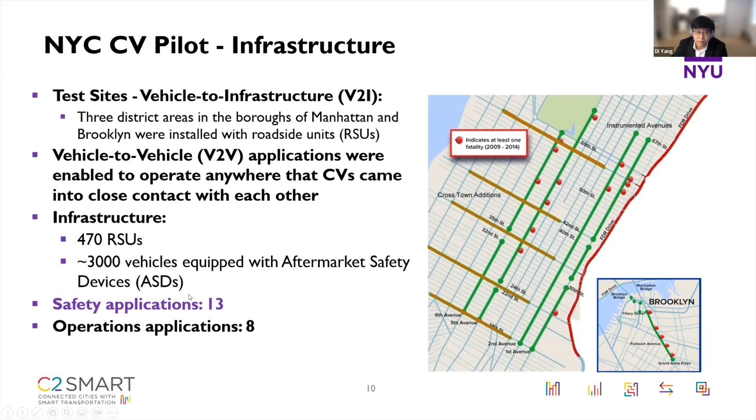And in terms of safety applications, for V2I applications, we have the following: red light violation warning, speed compliance, curve speed compliance, speed compliance at work zone, oversized vehicle compliance, where specifically we focus on over-height trucks, and also emergency communications and evacuation information.

And the V2V applications, again, can be enabled anywhere around the city. The V2V applications include forward collision warning, emergency electronic brake light, blind spot warning, lane change warning, intersection movement assist, and vehicle turning right in front of bus warning.

So besides the V2I and V2V applications, there is a third type which focuses on pedestrian applications. That includes the pedestrian in signalized intersection warning to vehicles, and also the mobile ped signal system, which was designed specifically to assist visually disabled pedestrians with navigation. So again, like I mentioned, there will be a dedicated webinar specifically to talk about all the pedestrian applications. So please stay tuned.

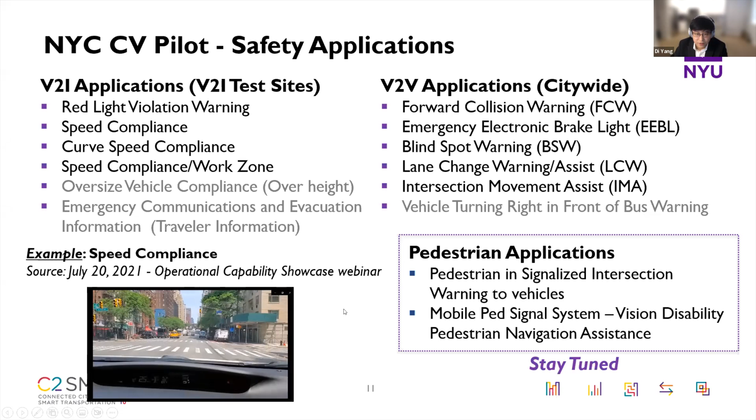Okay, and in terms of the experimental design, in this project a before-after treatment-control group design has been implemented. This is a quick illustration of this experimental design. Basically, all the CV fleet has been divided into either a control group or a treatment group. And the entire study period from January 1st, 2021 to December 31st, 2021 is divided into 2 periods, the before period and the after period.

So basically the before period is from January 1st to May 19th, and the after period is from June 1st to December 31st. And there's a small period in between, the transition period. During that time, connected vehicles in the treatment group will be transitioning to receiving active CV alerts. So in the before period, all those connected vehicles will not receive any warnings. But in the after period, connected vehicles in the treatment group will receive active warnings.

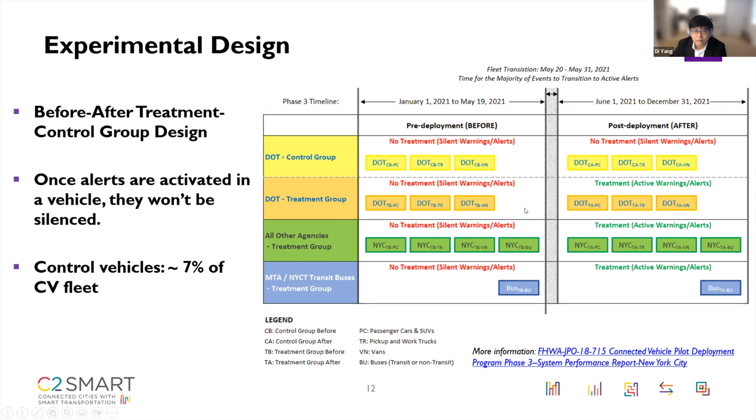And in terms of the data collection and obfuscation, in this project, the basic safety messages, or BSMs, transmitted immediately before and after warnings were collected. For each safety application, the number of seconds recorded before and after the warnings varies. But generally speaking, we have at least 5 to 10 seconds before the warning and 5 to 10 seconds or more after the warning, so that we know what is going on immediately before and after the warnings

are issued. And the data collected from these New York City connected vehicle projects are open to the public on the US DOT's ITS Data Hub CV Pilot Data Sandbox. So feel free to check it out if you're interested.

And besides collecting the data, the NYC CVPD project implemented a data obfuscation procedure, with the aim of protecting privacy and addressing liability issues for the participants. More specifically, the detailed latitude and longitude coordinates of the BSM data are replaced with artificial Cartesian coordinates, and also location bins. The unique IDs of the vehicles are removed, and the date and time are replaced with time bins, so we do not know the exact date and time of a specific event.

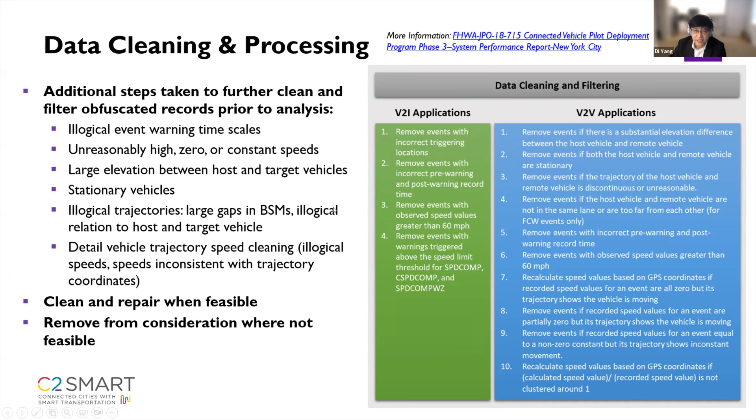Right. Okay, so now let's look at the safety evaluation methodology. So basically in this project, we employed 3 branches of methodologies to ensure that we can get the safety performance of the connected vehicles evaluated from different aspects. So the first one is to use the ASD data or the BSM data collected from the field. So what we did is that we first extract safety-related driver response behavior measures from the field-observed ASD data, and then we apply the gain score method, which is a relatively commonly used method in statistics to conduct before-after analysis.

And the second branch is the crash-based analysis. So here we employed the before-after safety analysis, which is a very common method in transportation safety to get the treatment effect of safety-related countermeasures. So in this project, the connected vehicle project is a potential safety-related countermeasure. So we employed the basic structure and framework of the before-after safety analysis in transportation safety for crash-based analysis. And we employed a survival analysis approach to conduct this analysis. I will talk more about that later on.

And the third branch is simulation-based surrogate safety measure analysis. So basically, for the first 2 branches, we use data collected from the field. And in the third branch, we use microscopic simulation to conduct a safety evaluation. And specifically, we calibrate the simulation model for both safety and operational measures and incorporate driver behavior models. And basically, we employ the multi-objective stochastic optimization method to do that. And I will also talk more about each of these branches later.

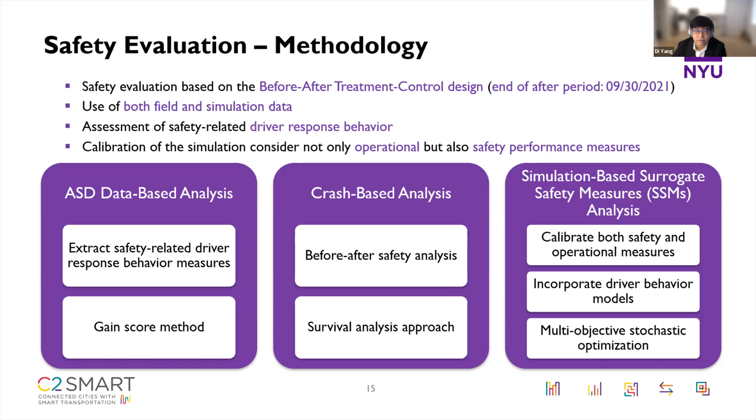Here, let's look at the first branch, which uses the ASD data. So here we extracted 3 safety-related driver response behavior measures by going through past studies in the literature. So the first one is the deceleration difference. It is defined as the difference between the maximum deceleration after a warning is given and the deceleration at the time when the warning is given. So basically, the main goal of this measure is to assess the driver's tendency to slow down, or basically the driver's response degree.

And the second measure is time duration to slow down to speed limit after warnings, which is defined as the time duration between the time when a warning is issued to the first time the observed speed is below the corresponding speed limit. Right, so we want to see how long it takes for drivers to react and slow down to the speed limit. And this measure is mainly designed for all the CV applications that correspond to reducing speeding events.

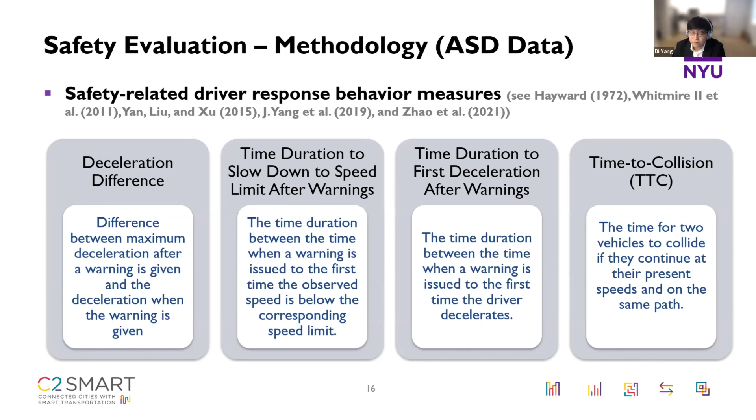And the third measure is time duration to first deceleration after warning. So basically, this is a more generalized measure compared to the second one, and is applied to all the CV applications that do not necessarily have a speed limit. And it is defined as the time duration between the time when a warning is issued to the first time the driver decelerates. And the last one is a very commonly used surrogate safety measure, time to collision, which is defined as the time for 2 vehicles to collide if they continue at their present speed and on the same path.

And in terms of statistical analysis, we include a commonly used gain score method to analyze the before-after control treatment group design. So basically what we did is that we first calculate 2 differences. One represents the difference between the performance measures in the treatment group from the before period to the after period. And the second difference is the difference in performance measures in the control group from the before period to the after period. And then we take the difference of these 2 differences so that we can get the safety effect, or basically the change in driver behavior based on the before-after control group design.

And due to obfuscation, we aggregate the safety measures to obtain the safety performance measures, and the confidence intervals are constructed by assuming the sample distribution follows the Student's t distribution. And that is the first branch of the methodology. And the second branch deals with crash data. So basically, we employed a survival analysis approach, which is a joint work by Dr. Kun Xie at Old Dominion University, Dr. Kaan Ozbay, who is my advisor at NYU, and also Dr. Hong Yang at Old Dominion University, and also me, right?

So basically, the main motivation for the survival analysis approach is that to assess safety countermeasures in the real world, it may not always be possible to find a proper reference group, right? So when that reference group is not feasible, the traditional before-after safety analysis methods, including the empirical Bayes or the full Bayesian method, may lose their power, right? So that is one of the main motivations to propose this survival analysis approach. Basically, instead of modeling the crash frequency or crash count, which is one of the most commonly used safety performance measures for crash analysis, we look at the time intervals between two consecutive crashes.

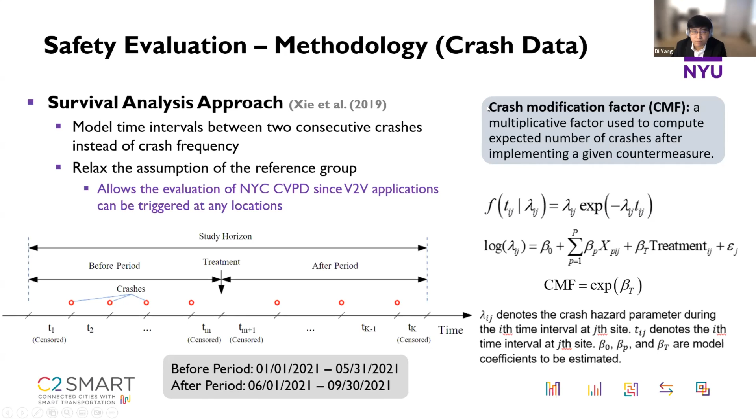And the third branch is the simulation-based method. So in the future, we have another webinar dedicated to this topic. So today, I'm going to briefly give you a little bit of a preview of this third branch, but stay tuned for that webinar.

So one of the main objectives in using simulation models to evaluate the safety effect of connected vehicles is that we need to be able to properly analyze the safety benefits of connected vehicles, right? So in order to do that, it is not only necessary to calibrate the simulation model for traditional operational measures, including volume, travel time, and turning movement, etc. But it is also very important to calibrate the microscopic traffic simulation models for safety measures. So here we employed traffic conflict severity distributions to do that.

And then we used the open source microsimulator SUMO for our analysis. And then we integrated 7 of the connected vehicle applications and the driver behavior model into the simulation model. And then we applied a multi-objective stochastic optimization, SPSA, for the calibration. And again, if you want to know more about the simulation-based safety evaluation and the calibration procedure, please stay tuned for that specific webinar.

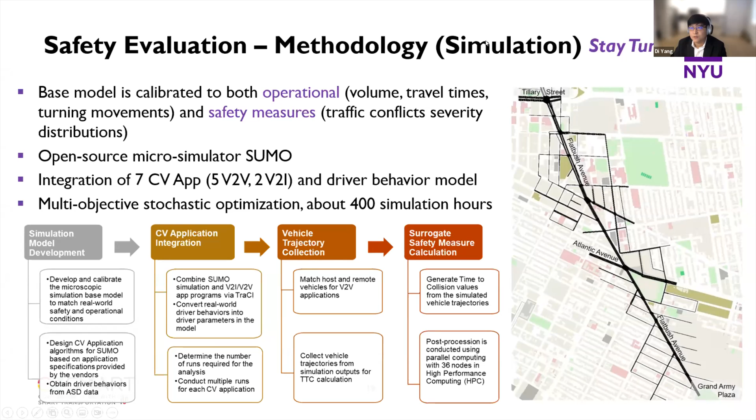Okay, so now let's look at some results. First of all, let's look at the results for the speed compliance application. After data processing and cleaning, the total number of events for speed compliance is a little bit more than 40,000 events. And compared to the silent warning scenarios, there are an additional 47 events per 1,000 events that show drivers slowing down to the speed limit when treatment was enabled. So basically more drivers try to comply with the speed compliance warnings after it has been turned on.

And in terms of driver response behavior, we saw an extra deceleration of 0.148 meters per second squared on average after the speed compliance warnings were issued. And there is also a small reduction in time duration to slow down to the speed limit. All three of these findings are statistically significant at the 0.05 significance level, which indicates that there are some safety improvements after the speed compliance warnings have been turned on.

Again, these results are based on the data collected from the field, right? So they do not include results from the simulation. And for the simulation results, please feel free to check out the webinar dedicated to simulation.

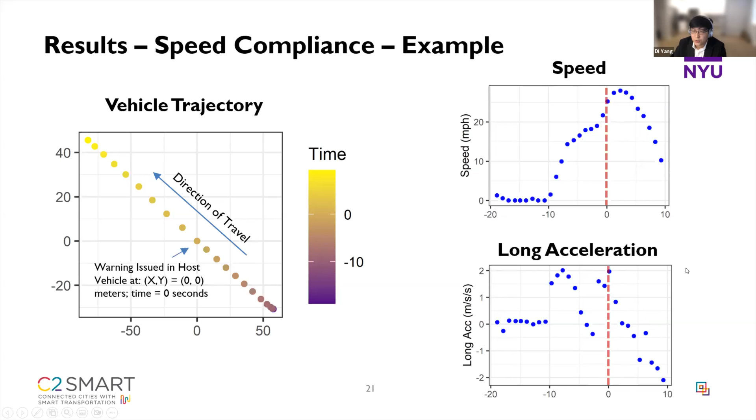As you can see, after the warnings are issued, there's a brief increase in the speed of the vehicles, but then followed by a deceleration, which can also be seen from the longitudinal acceleration of these vehicles, right? So at the time warnings are given, the drivers are accelerating, but then it slowly turns to deceleration, basically. And that is the first application.

Secondly, we have the curve speed compliance. The curve speed compliance application is only installed at one curve that connects the local streets to the FDR freeway. If you want to know more about that, please feel free to check out the report. After the data cleaning and processing, there are a total of 27 events.

We also analyzed the potential reduction in vehicle speed at the entry of the curve, as well as the lateral acceleration in the curve. We can see there is a positive reduction in vehicle speed and also a positive reduction in lateral acceleration in the curve. And they are all statistically significant according to the 0.05 significance level.

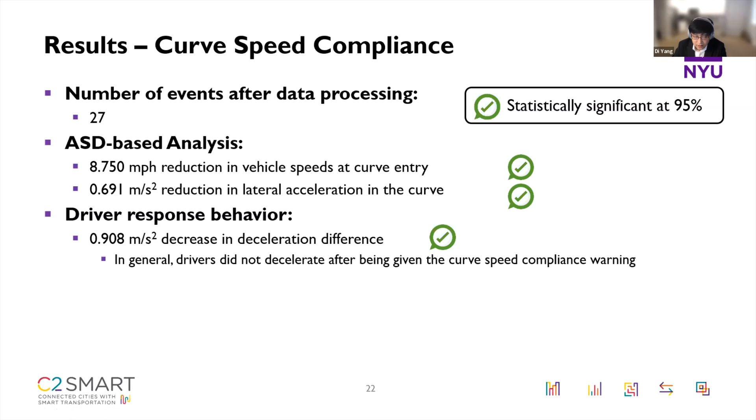And in terms of the driver response behavior, we can see there's a decrease in the deceleration difference. And this decrease is statistically significant at the 0.05 value. Basically, we were expecting to see an increase in deceleration difference. This is actually proved by just manually looking at these 27 events. Among these 27 events, drivers do not show the deceleration behavior after warnings are issued.

And for the speed compliance in work zone, after the data cleaning process, we have 2,665 events. For the driver response behavior analysis, we analyzed the deceleration difference as well as the time duration to slow down to speed limit. For both of these, we can see that there are extra decelerations in the drivers after receiving the warnings, and also a positive reduction in time duration to slow down to speed limit, and they are all statistically significant. Which means that for the speed compliance in work zone application, there are safety benefits or safety improvements after these warnings have been turned on.

And then let's look at another V2I application, that is the red light violation warning. After the data collection, we have a little bit more than 2,000 events. When we look at the number of events that drivers are likely to comply to the red light violation warning, compared to the silent warning scenarios, there are approximately 152 fewer likely red light violations per 1,000 events when treatment was enabled.

Right. So basically, to identify a potential red light violation, we look at the driver's speed. If the driver did not come to a full stop after receiving a red light violation warning, then we identify it as a very likely red light violation. So this is how to identify the potential red light violation using the ASD data.

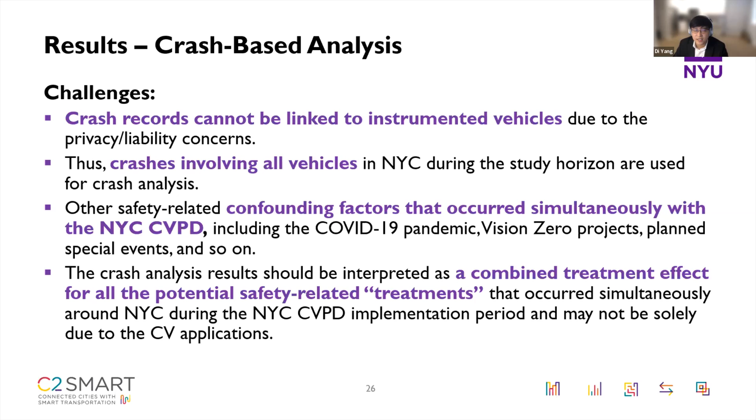Okay, so here we look at 2 types of crashes, which are rear end crashes and side swipe crashes. The rear end crashes are specifically for forward collision warning and emergency electronic brake light, because these 2 V2V applications specifically target rear end crashes, right? During the study period, there are 4,581 rear end crashes in the city. And we estimate the CMFs, the crash modification factors, for the injury crashes and also the property damage only crashes. There are no fatal crashes during the study period.

As you can see, the estimated CMFs are less than 1, which means that there's a safety improvement, a reduction in the number of crashes. But for the injury crashes, we have marginally insignificant results. And for PDO crashes, we have statistically significant results.

And side swipe crashes are specifically for blind spot warning and lane change warning, right? Because these two V2V applications are designed to reduce side swipe crashes. During the study period in the NYPD database, we have 1,471 crashes, and we separated them into injury and fatal crashes and PDO crashes.

As you can see, for the injury and fatal crashes, we do not have statistically significant results for the estimated CMFs. And for the PDO crashes, we have a less than 1 CMF estimation value and also statistically significant results, right? So basically, we can see there is a reduction in PDO side swipe crashes, and also a reduction in PDO rear end crashes during the study period.

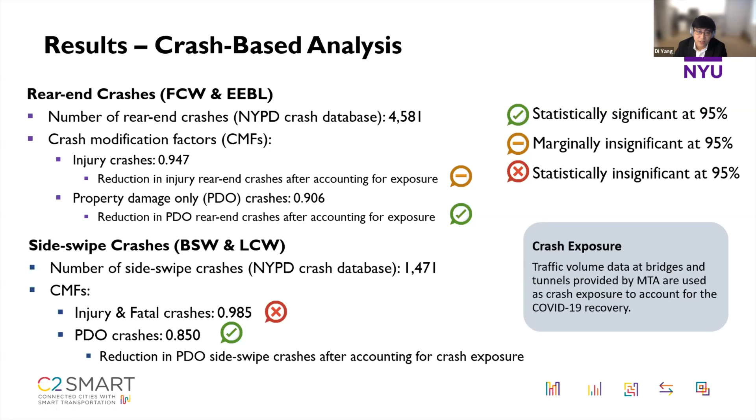Okay, so now let's look at some conclusions and lessons learned. Based on the analysis of the ASD field data, out of 9 evaluated applications, 5 of them show statistically significant safety improvement, 2 of them show marginally insignificant safety improvement, and 2 of them show insignificant safety improvement if we use 0.05 as the significance level.

And conditioning on addressing the privacy concerns of the participants and stakeholders, one of the potential lessons learned is that we may consider using a different procedure to preserve the location and temporal information in the future as much as possible, so that we can conduct more detailed research about the impact of spatial temporal factors on safety performance.

And also, more factors may be considered in the design phase to increase the low quantity of some of the CV applications. Like I mentioned, several of the CV applications do not receive enough events. For example, one of which is the vehicle turning right in front of bus. From January to September last year, there's only 1 recorded event for that application. So in the future, we may consider some factors including transit bus participation and pre-deployment driver behavior analysis and

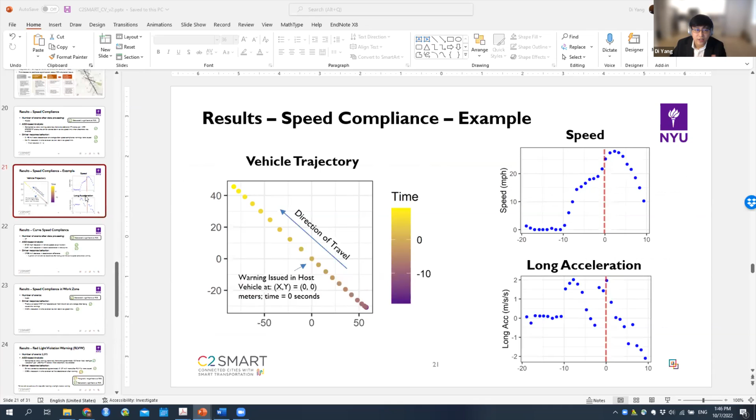Dee, the question says, do the drivers follow the warnings, and have you checked the performance of the application? Right. Yes. Thank you for this question. As I presented, we evaluate the driver's response behavior for each of these safety applications. And then we extracted several driver behavior responses so that we can have a relatively comprehensive analysis of the driver response to the CV warnings.

As you can see, like I summarized here, out of the 9 evaluated safety applications, we have 5 to 7 applications that show statistically significant driver behavior change, or marginally insignificant driver behavior change, right? So we can observe the driver behavior change due to the CV warnings.

And also, in terms of the performance of the applications, like I mentioned, there is actually a webinar to demonstrate the operational capabilities of all the applications. I'm sorry if you guys cannot hear the video sounds, but feel free to check out this webinar right here. All the videos are published there, so you can see how each CV application operates.

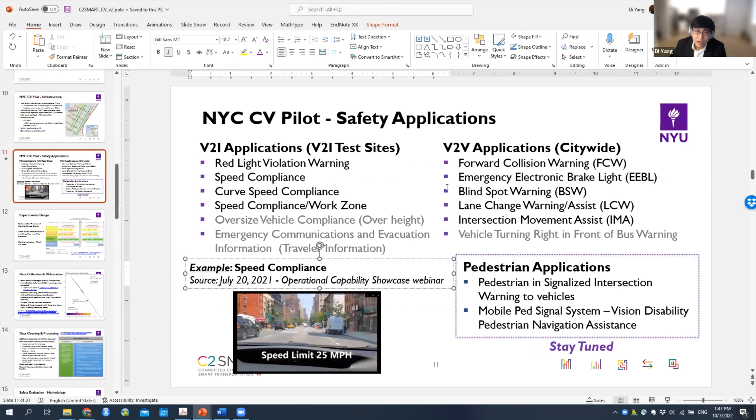And also during the data cleaning and processing phase, we tried our best to see the performance of the applications from a data perspective, and we tried to identify the potential erroneous or illogical observations and try to repair or clean or remove all those scenarios before doing the analysis. I hope that answers your question.

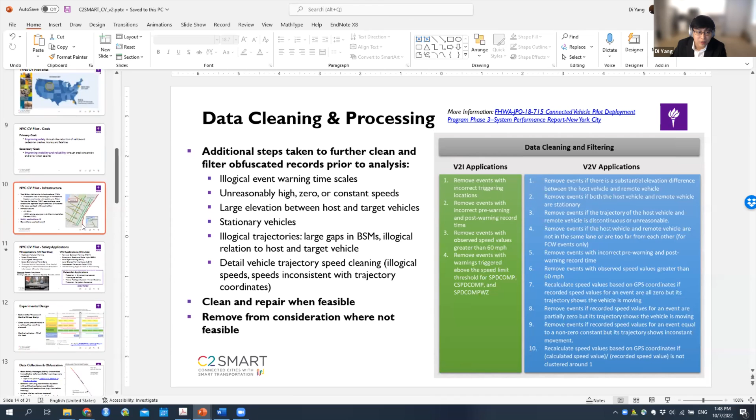So Dee, there was one more follow-up portion of that question, which was how are the data stored and uploaded? Oh, right. In terms of the data storage and uploading, please feel free to check out the first report right here. It includes all the details related to how the data are collected from the vehicles and from the infrastructure, and how the data are stored, obfuscated, and uploaded to the ITS data sandbox.

Okay, yeah, and then Dr.

Jenny Gao has also put a message in the chat in response to the previous question about the reaction percentage and performance. So check that out in the chat.

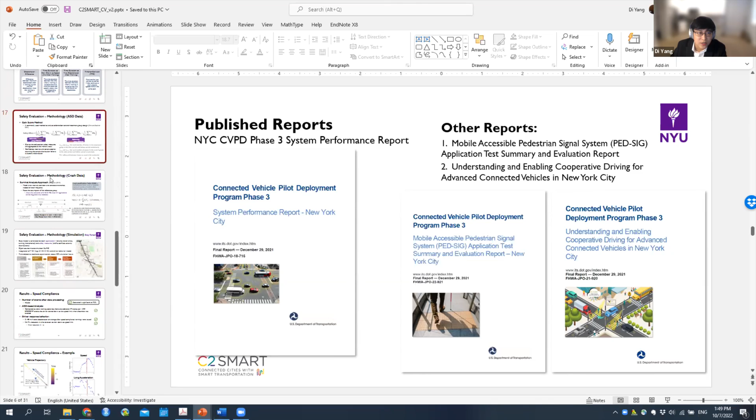Thanks, Dee. Moving on, we have a question about the curve speed warnings and asking why they appear to be pretty low. And I think there's a reference to slide 27. Right. So yeah, this is a good question. So basically, if you look at curve speed right here, this is the number of events after data processing.

During the data collection procedure, we found that there are false positive curve speed compliance warnings at that location. That location is actually a curve connecting local streets to the urban freeway, so some of the warnings are being given to the vehicles moving on the freeway. That is why after the data cleaning, there are not many of the events left. I hope that answers your question. Also feel free to check out the data published on the USDOT Data Hub sandbox to have a better understanding about that.

Thank you. The next question is, what's the difference between your before-after analysis and the traditional DID analysis? That's a great question. When we were deciding what method to use for this project, we considered several causal inference methods, one of which is the DID method. But because of the data obfuscation procedure, we do not know the exact location or the exact date of the event. That puts constraints on the commonly used causal inference methods we can use, including time series intervention and the DID method.

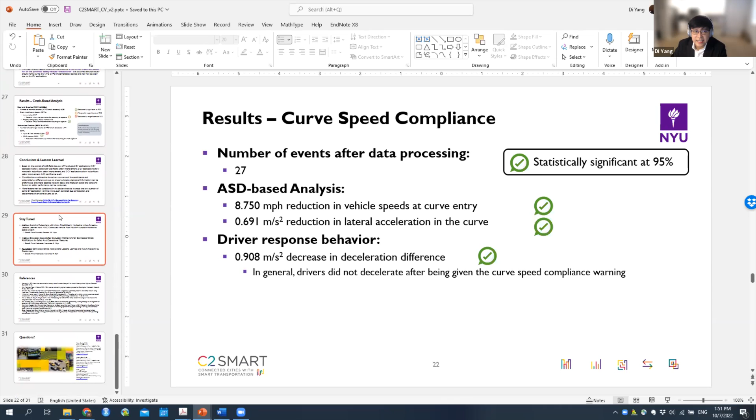So here we employed a relatively more commonly used method and a relatively simple test to get the results. But like I said, if in future CV testing a different data obfuscation procedure can be employed, then more causal inference methods and more factors can be included in the data analysis and in the performance evaluation procedure. I hope that answers your question. Thank you.